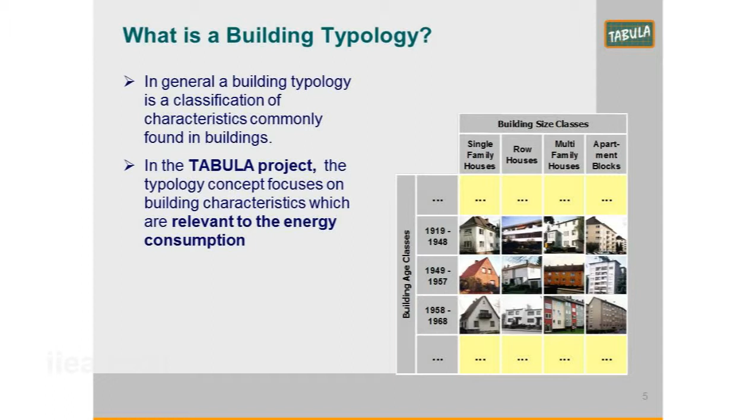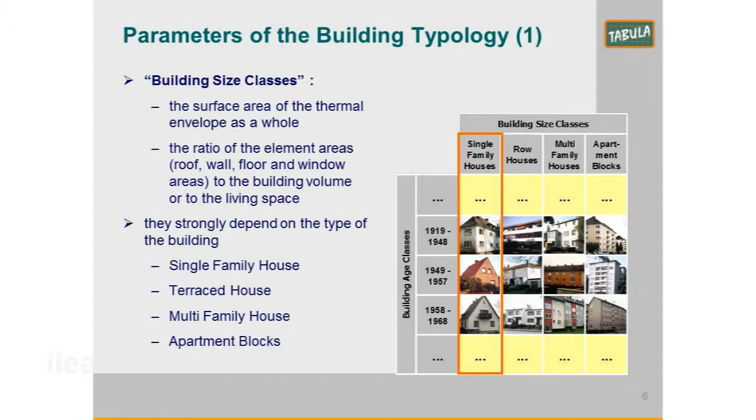What is a building typology? Effectively, you're looking at common characteristics of buildings, and for Tabula, what we're looking at is energy consumption. You're looking at building size classes, also terraced houses, detached houses, apartments, etc., and looking at their energy performance and common characteristics. The outputs you're looking for are particularly sample buildings to give advice.

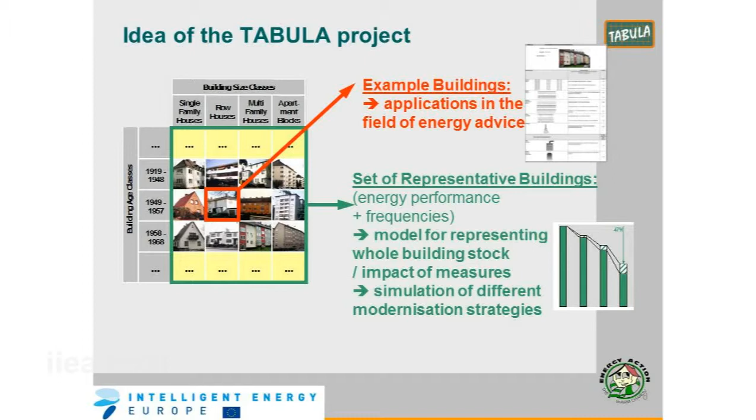Applications in the field of energy advice to householders, to energy consultants, to policy makers, and to many people in the construction industry. While a lot of people here may have an in-depth knowledge of it, and some of us know it inside out at this stage on everything related to energy performance in buildings, the vast majority of people out there haven't a clue, and most people who are going to make investments don't really know what the impact of individual measures will have on their houses. So this is one of the main aims of Tabula, to get that information out there.

It also produces sets of representative buildings, so you can model your whole building stock and look at the impact and simulation of all these refurbishment strategies - feeding into national retrofit programs.

The expected results from each national partner is to get the typical values for building energy performance, for heat loss through all the various elements, looking at particularly the frequencies of all the building types in the country, and also the calibration factor between measured energy use - which is the asset rating, what the BER cert is based on - and the actual consumption.

I think there's quite a lot - nearly everybody is presenting paybacks based on asset ratings, but how does that really represent the way that people are actually saving energy, saving money after works have been done? So more research is needed on that, and some of that's being done through Tabula.

Within Tabula, we're also looking at the energy saving measures for two stages of refurbishment, a standard and advanced, being decided for each individual country themselves. The main deliverables from Tabula will be a national typology brochure or leaflets - I'll explain that later - and also a building typology web tool. More on that anon. I'll show you the results of all of that to date.

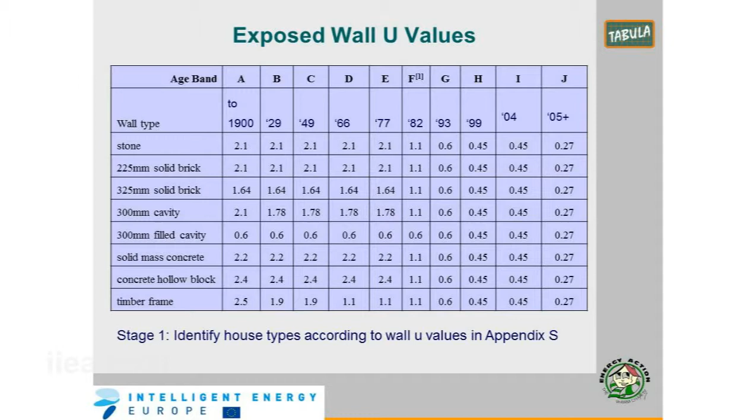SEAI very kindly provided us with the breakdown of the 115,000 BER certs that were produced by September 2010 at that stage of the project. So Appendix S from the DEAP methodology - for those not familiar with it - down the left-hand side you have all the different types of wall construction, and across the top you have the different age bands, and you can see how the U-value, the rate of heat loss through the wall, changes. For us this was a very good starting point to identify the main Irish clusters of house types.

SEAI also gave us the stats at that stage for those 115,000 BER certs for existing buildings - where did they fall? Within that we could look at the same table by percentages, and start to rule out various areas, because obviously there were really no timber frame houses built in the 1930s, 40s, or 50s. So we started piecing things together to see if we could cluster the house types and make sense of it all. The outcome is that we basically have 29 Irish house types.

We have 5 Irish apartment types - we're doing some further work on that. There's a subtle difference in that in Ireland we have BER certs for individual apartments as well as the whole apartment block, whereas in nearly all continental Europe they treat the apartment building as a single entity for building energy rating purposes. They also have centralised or group heating systems, whereas most of our apartment buildings end up with individual heating systems in each flat. So anyway, we're getting around that.

The buildings from all the EU countries are entered into this tabula.xls. Now I'll go through some coding details - I'll flash through this because it's kind of nerdy stuff, but it's just to let you know that as well as analysing all these house types in the Irish DEAP methodology, we've also coded them all and put them into this master European calculation engine.

So first of all, we have 5 distinctive Irish age bands. Everything up to 1977 - we had no insulation requirements within any building regulation up to 1977, so we clustered everything together up to that point.

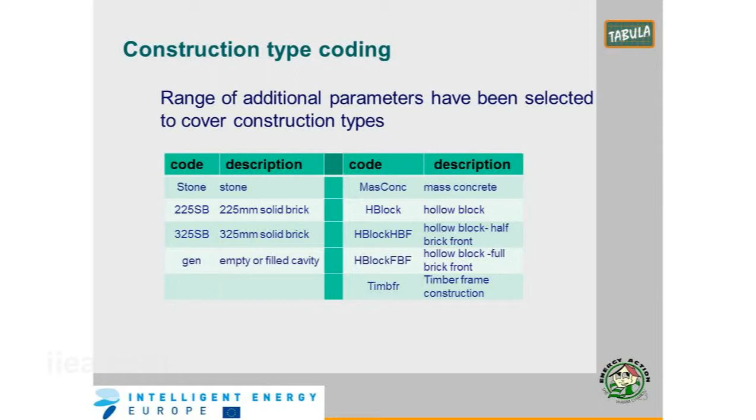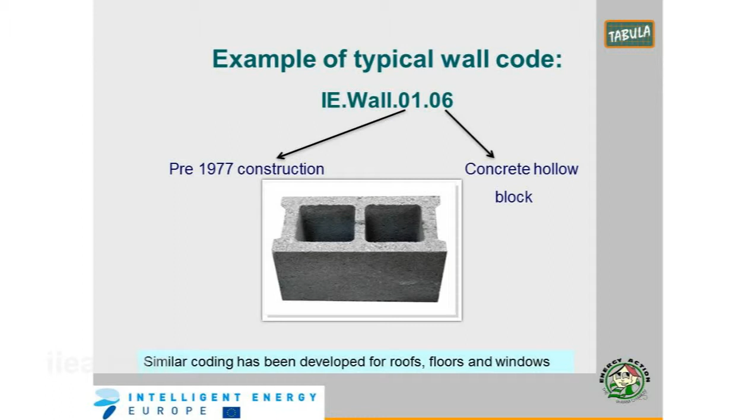We then built up a whole coding structure for all these Irish house types that we developed and identified. This is, again, hollow block, half brick front, 1977, before 1977.

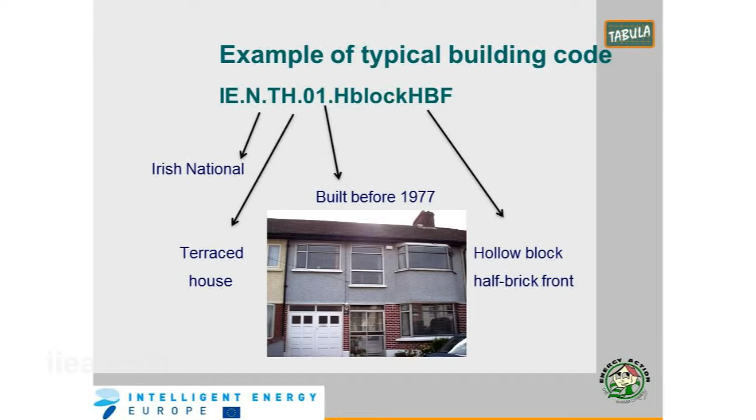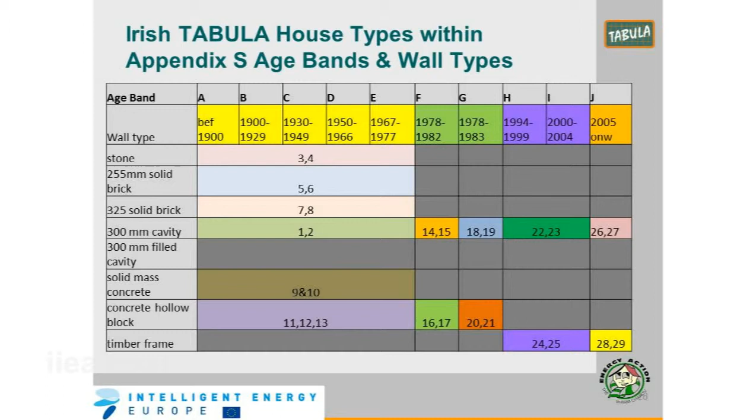And back to that Appendix S table, we then cross-referenced it back to that table of our 29 house types, so we ended up with a scatter matrix of Irish house types.

This is just a sample of them. The whole idea ultimately with Tabula is you go onto a website, you'll see an array of photographs, and you say, that's very close to my house. Click on it, and you can get a whole range of energy efficiency information relating to your house type. It's just getting information out there.

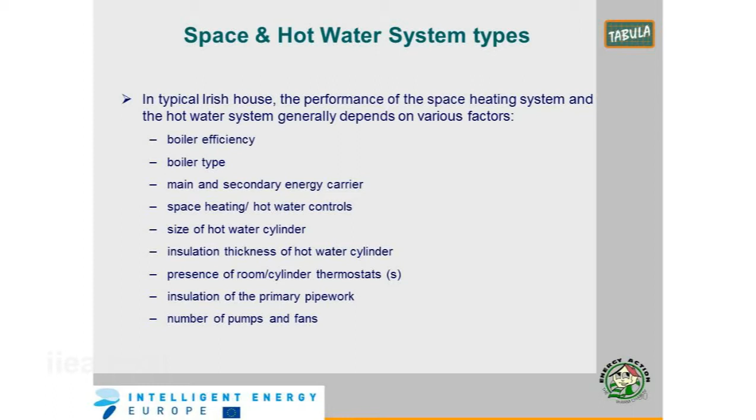We did similar coding for all the hot water systems. I won't bore you with all the details, but basically we ended up with huge extended codes of all the Irish heating systems.

One of the things that was important as we were doing this is we had to ask, what's a typical Irish building? What's a typical Irish house, say a solid block house from the 1940s? What kind of heating system does it have? We had to make some decisions.

When it was built in 1940, it wouldn't have had a central heating system. So our typical 1940s house, we would say maybe had a central heating system that went in the 1970s or 1980s and really hasn't been upgraded much, with a very simple control. So we had to make a lot of these kind of decisions as we went about it.

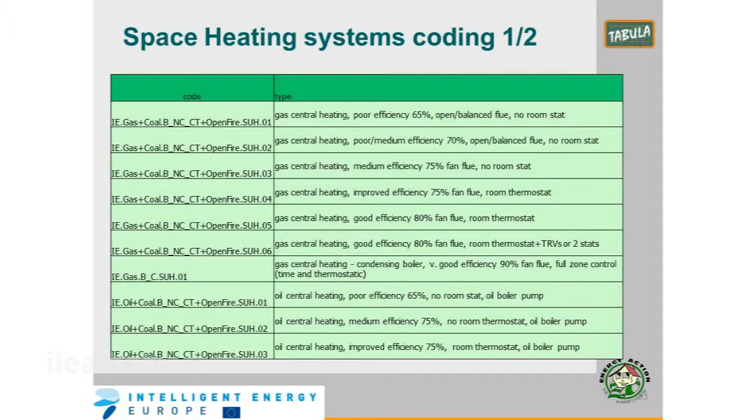So again, I won't go through all of these, but we coded in all the Irish heating systems as well.

The next thing we had to look at was to identify two stages of improvement and analyze all these 29 house types for two stages of improvement.

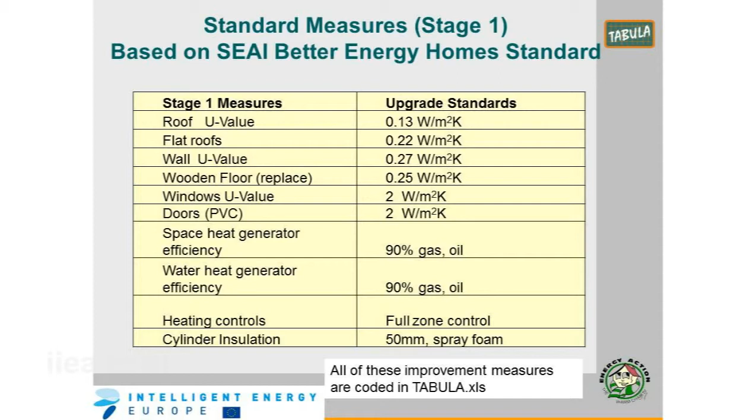So our first stage was largely based on SEAI's Better Energy Homes program. We've added on top of that, for example, replacing wooden floors where possible. You find there's an awful lot of suspended wooden floors, particularly in the greater Dublin area, in houses built in the 50s and 60s. And also windows, which wouldn't be part of Better Energy Homes, or cylinder insulation.

Then our stage 2, which was advanced measures, here we were now going to basically get all the building fabric up to the 2011 building regulation standards and start introducing renewable technologies, heat pumps, and solar thermal as well.

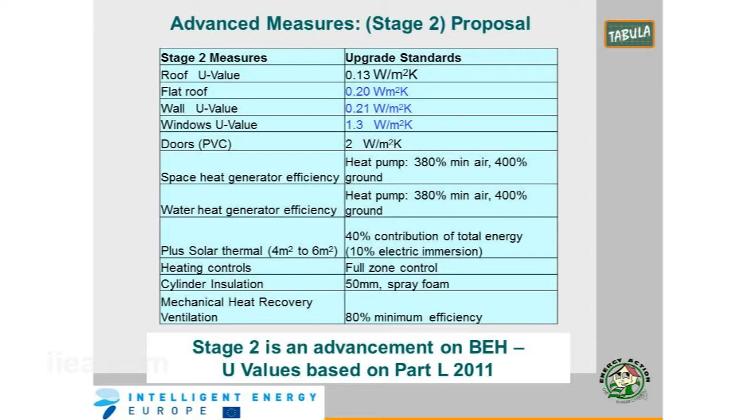So for our 29 types, in terms of the deep analysis, we were basically bringing them through the second stage, mostly somewhere between a B1 and an A3 rating.

So what's the common coding process in Tabula? Basically, what we did was we entered all the building types into Tabula.xls, all the heating system types into Tabula.xls, and all the standard and advanced improvement measures went in as well.

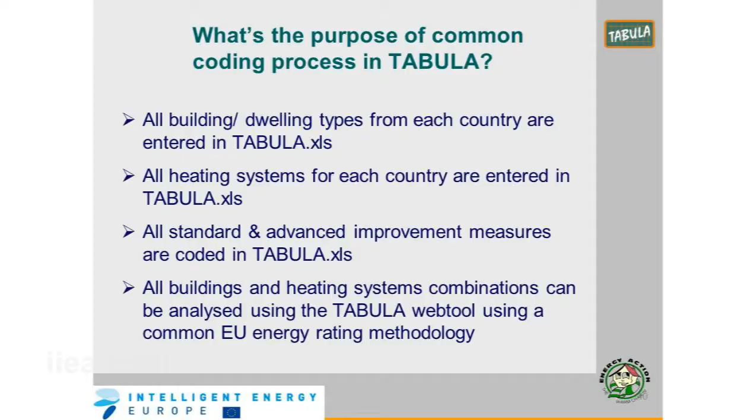This enables all of the systems to be analyzed through a common European methodology in this common Tabula web tool. So what does it look like?

It is in development stage at the moment. It'll be ready on the 1st of November, which is the launch date.

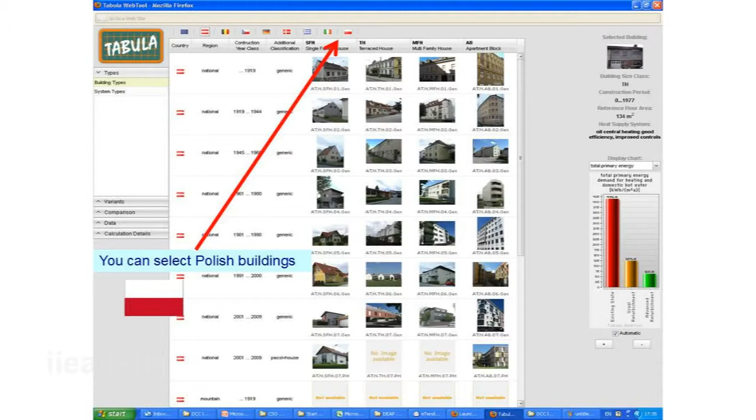But within this, you can basically click on your Irish house types and get full details on your Irish house type. You can select your Polish buildings, your Czech buildings, or whatever country you wish.

You then select your heating system, and you have a whole range of options, all the variants that we've entered in for the Irish heating systems.

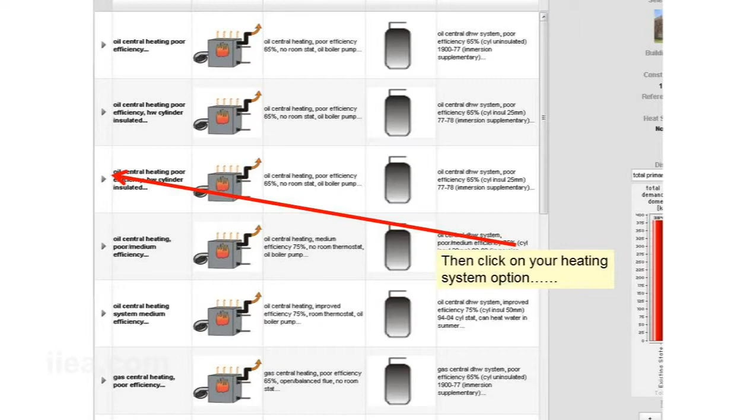And then there's a whole plethora of calculation data behind this. It's provided for the 3 stages of refurbishment in terms of energy needed for heating.

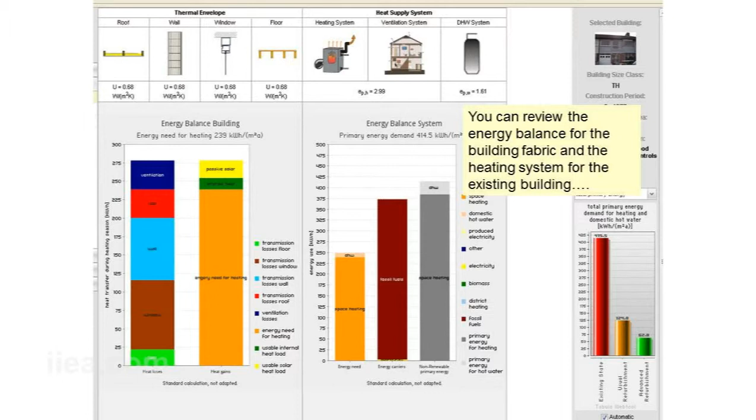You then get the energy balance statement, again for this particular combination of building and heating system in its existing state. The same data is then produced through the web tool, showing it for the standard refurbishment measures.

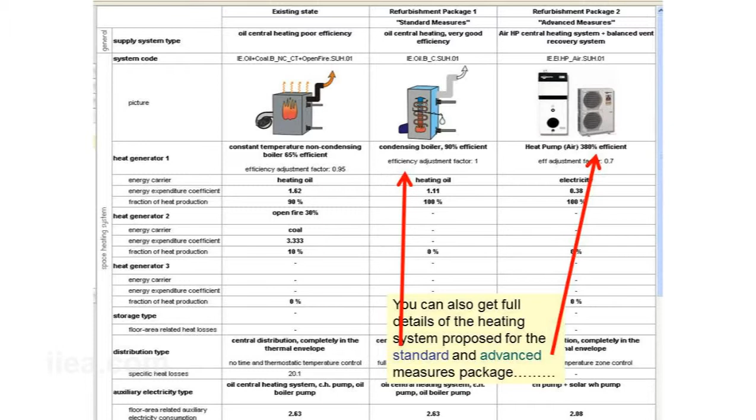You again get bundles more information there in terms of the details of the heating system for the proposed standard and advanced measures.

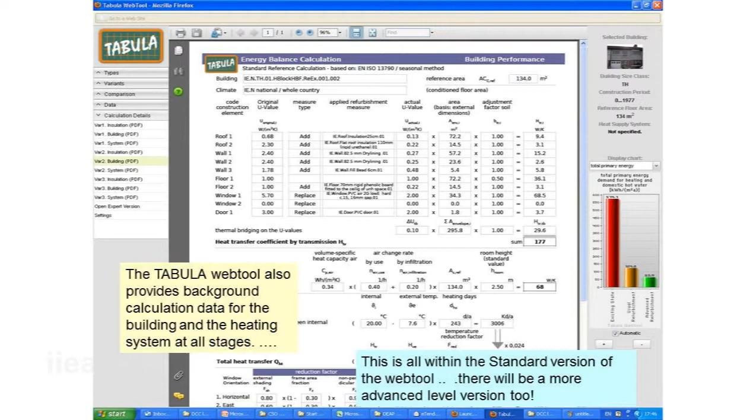And there is a whole range of calculation data deep in the web tool, but it is there particularly for researchers and those who are interested in those inner workings.

And all of this will actually be within what's called the standard version of the web tool. There will be even an advanced version of the web tool which goes into deeper detail. So there's plenty of stuff.

If anyone is a researcher, there's plenty of work there to keep them busy for a long time, when this goes live.

We've also produced national brochures, required for each country. The idea is straightforward paper or electronic brochures that can get out to the mass public so they can understand what this is all about. This is an example of a brochure for a 1970s house in rural Ireland with cavity wall construction. In all the brochures we show the house in its existing state, then the first stage of refurbishment and the second stage of refurbishment.

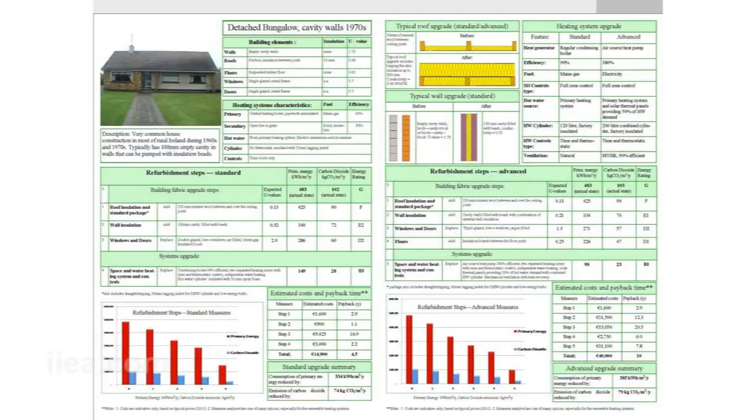You'll see the costs associated with the refurbishment measures, the improvement in technical performance of the property, the paybacks associated with those measures, the energy saved and the CO2 saved. Sections are shown of wall construction and roof construction. Many of you here will say, sure, I know all that stuff already, but it's the standard householder who really is coming to this for the first time.

Last year I was in the house of a guy in Malahide, a very nice detached bungalow built in the late 1960s. He had very good double glazing, and he was telling me very proudly of all the work he'd done on his floor. He'd got external wall insulation done, and his attic insulated with 300 millimetres of insulation. He was telling me how proud he was, that he was going to get his house to a really high standard.

As I was finishing the survey, I said, 'Where's your boiler?' We went outside - the boiler was a 20-year-old boiler. He said his plumber told him, 'Don't change that boiler, it's the best thing, they don't make them like they used to.'

So I knew when I was going to do the BER cert, I'd have to break this to him very gently. I had to call him up and say, 'Listen, you've really improved an awful lot, but you're now up to a D1 rating.' The guy said, 'I've just spent 15 grand and I'm at a D1 rating.' I could see his face hitting the floor. So I told him he just had to do the second part - get his boiler changed and get his heating controls up to grade.

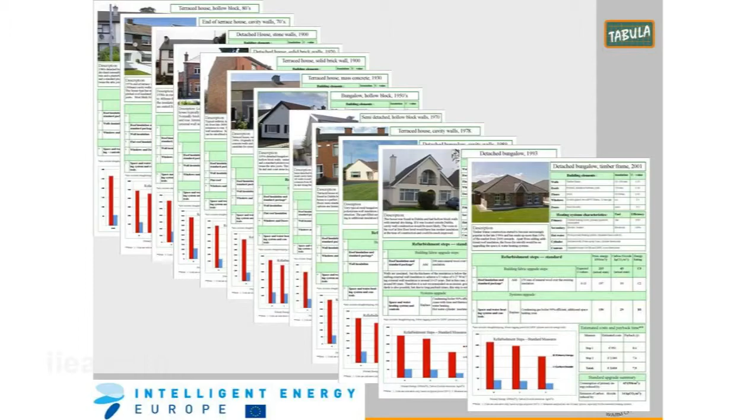But this kind of brochure for all these different house types will help get information out there. So we have a whole scatter of them ready, and we're moving on shortly to the apartment buildings.

In terms of national statistics, the BER database is an excellent resource. It's not a scientific sample, but we're doing a lot of work with SEAI at the moment on analysis across the different house types, looking at the minimum, maximum, and average scores compared to what we have from Tabula, against the national database. It's been a very good learning curve for us and for SEAI.

I think they've actually had to develop advanced query tools on the national BER system in order to answer some of the queries we've put to them. We look at all that work where we're cross-referencing.

So in terms of the next stage for Tabula, the web tool will be live from the 1st of November - the address will be on the final slide. Our brochures will be ready to go out in about 6 to 8 weeks' time. More work will be done on the national statistics and linking Tabula into the national BER database. A full scientific report on the entire project with technical details will be available by the end of the year.